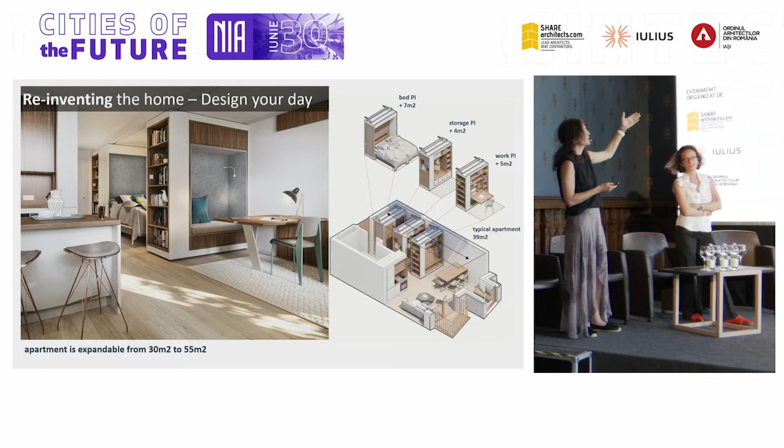This is a very interesting project, which is actually being built. We created this system with Vitra, where you can actually have a system of walls. You can actually choose what type of walls these will be. And this will give you options for your apartments.

To be honest with you, when we first did it, we didn't think that the developer would go for it, and we didn't think that people would buy it, because this was optional. But 80% of the people buying these apartments went for the option to select this kind of furniture idea.

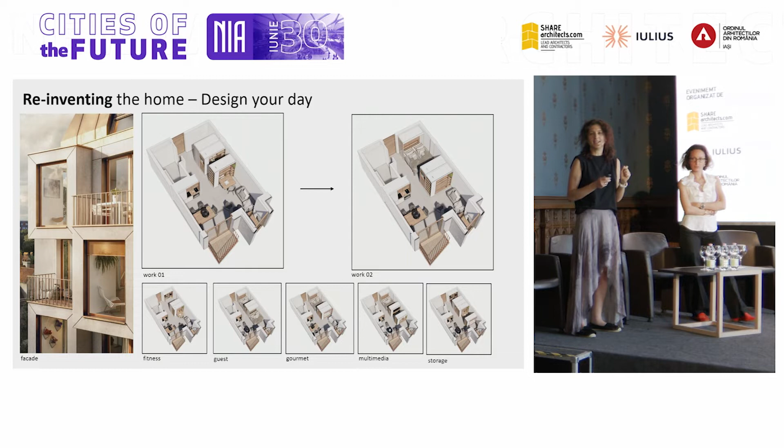So we come to this project, we come to Iasi. What we tried to do here is two things: bridge time. How do we bring together the old and the new? How do we create a notion of a future architecture for a city that is so heavily charged with history?

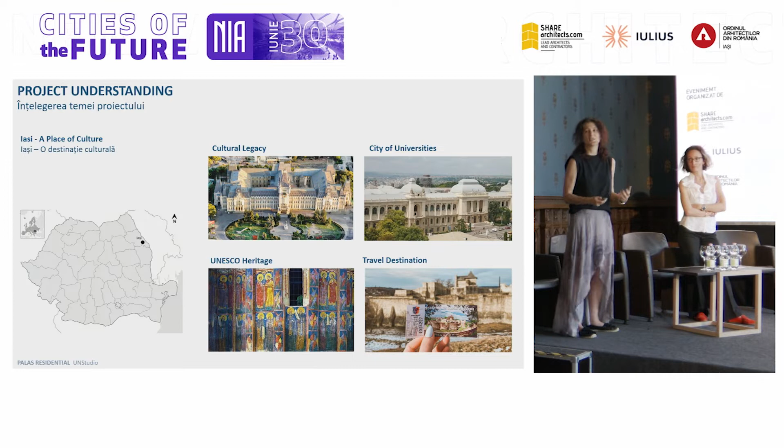Of course, we come to Iasi and we see that it's a very, very rich city in terms of culture, in terms of academic, in terms of business. It's very active, it's very socially active.

So what do we do? All of our colleagues explained how we had to meet program, how we had to deal with these extremely complicated regulations and restrictions. So we carved up the volume. We made the maximum, let's say, envelope of the building, and then we tried to see what happens with the program.

What type of program do we want to have there? We did not want to have fully residential. Of course it was a requirement to have a retail platform, but we wanted to maximize what we can do with the public area. So it's not just the public pathway, not just the public plaza, not just retail shops. It will become a very culturally and socially active part of the city.

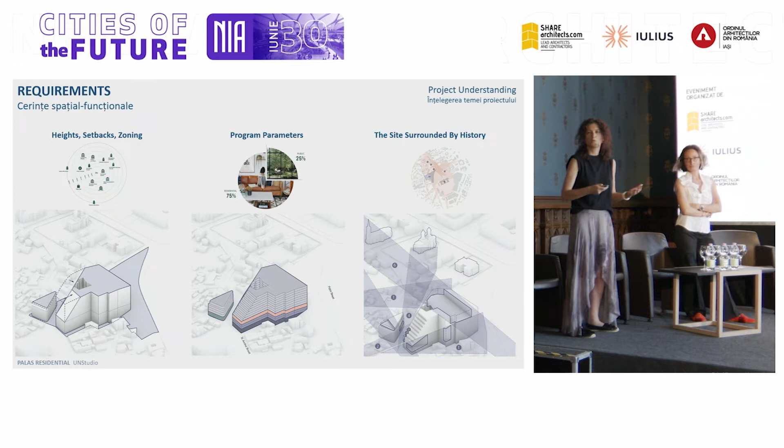And of course we had all these viewing corridor restrictions, which actually carved up the volume, which you saw in previous presentations, how that led to various massing explorations. So this is our goal: to create a contemporary environment in a historical setting.

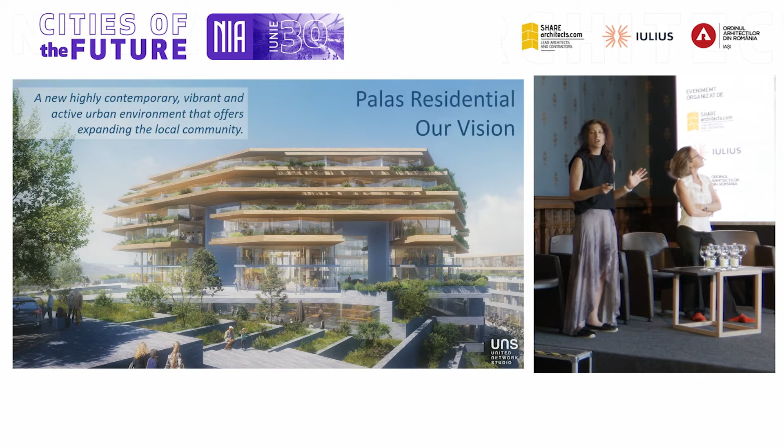We start by having some basic design drivers. What do we want to do? We want to add green. We want to create a green link to the city. We want to bring the Palace Square park through the building and down to the Sfântu Andrei neighborhood.

At the same time, we want to revisit how we look at the monuments around us. We don't want to stick to the existing views, we don't want to stick to what is known, but offer a kind of pathway, a frame, a frame-by-frame journey through the project.

We want to do that with respect to people and the environment, a human-centric approach, tactile materials, earthy materials, a lot of green, a biophilic experience that would enhance the microclimate, that would make a cooler space within the hot summer.

And of course the goal is to create a new urban community. This is the place where we think people can make little offices, where creative individuals can do a pop-up practice, where you can have co-working spaces, where you can have exhibitions that relate to the Palace of Culture.

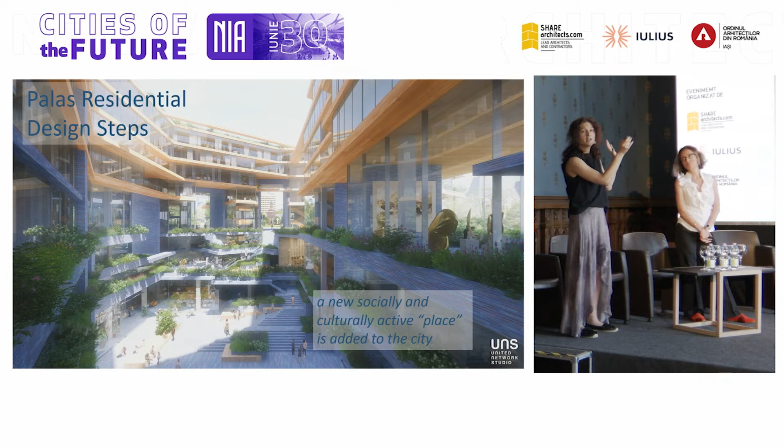We want to create a lively courtyard where you can see the past of the city, but where people are actually working towards the future of the city.

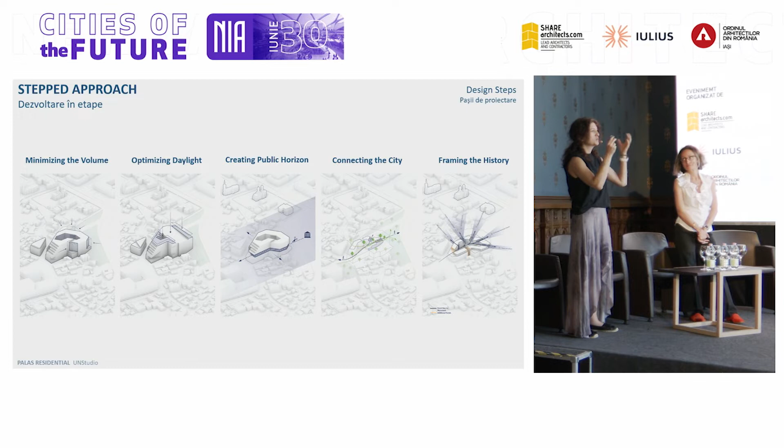Stepped approach - this was necessary, of course. The volume, the maximum volume, and the various steps that we took in order to reach our final massing. We will focus on 5 main steps from this process. First of all, we took the original massing, the maximum envelope, and we tried to squeeze it in height as much as possible. We actually managed to go almost 10 meters lower than the allowable maximum height.

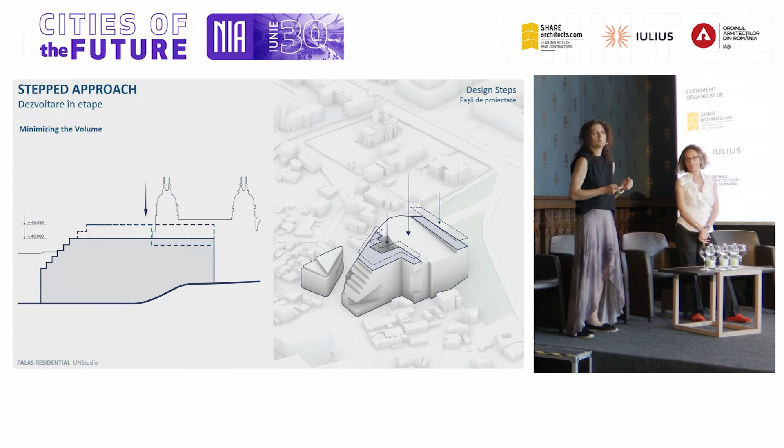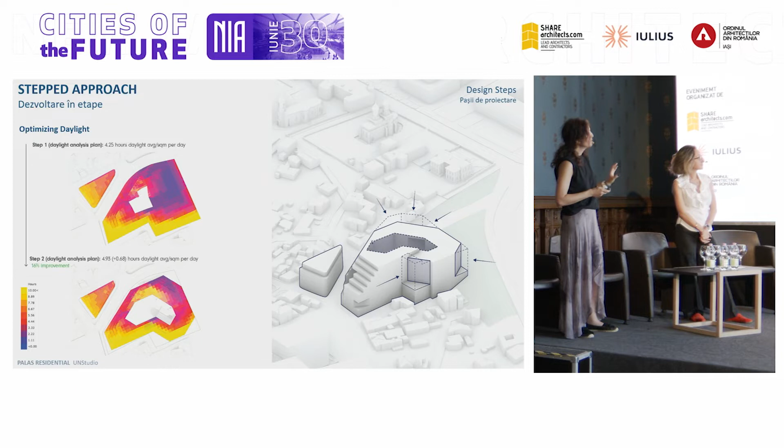Of course, daylight is super important for apartments, super important for people's health and the way they feel. We analyzed this and made sure that all apartments have the proper daylight, even in the worst time of the year. In order to achieve that, we chopped the massing even more.

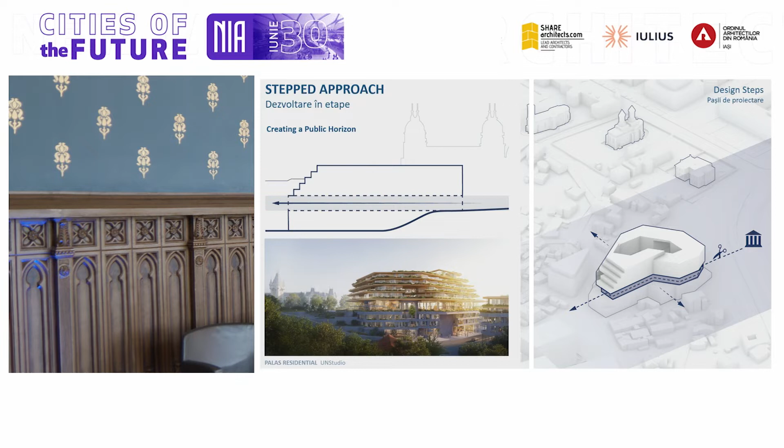And here is one of the main pillars of our proposal. We wanted to split this volume even more so that we reduce the perception of its volume. So we create this horizontal layer that pulls through Palace Square, through the building, and it divides the building into 2 parts. We have this transparent horizontal layer where you can have 360 views.

This layer is the layer that we want to socially activate. This is our community layer, let's say, where you can have all this flexible program, workspaces, community functions, and so on.

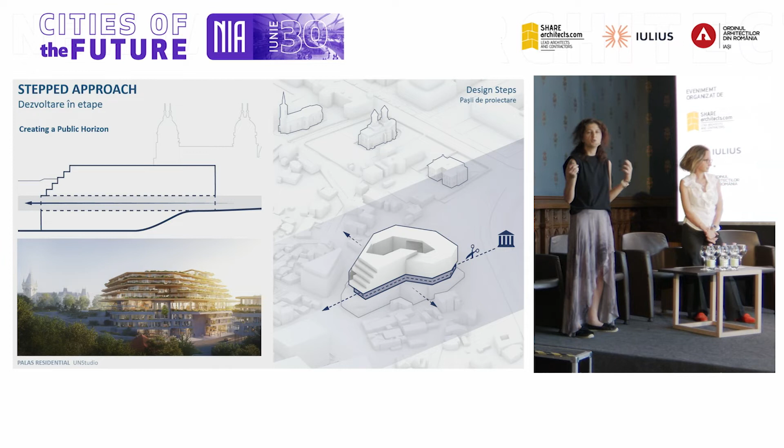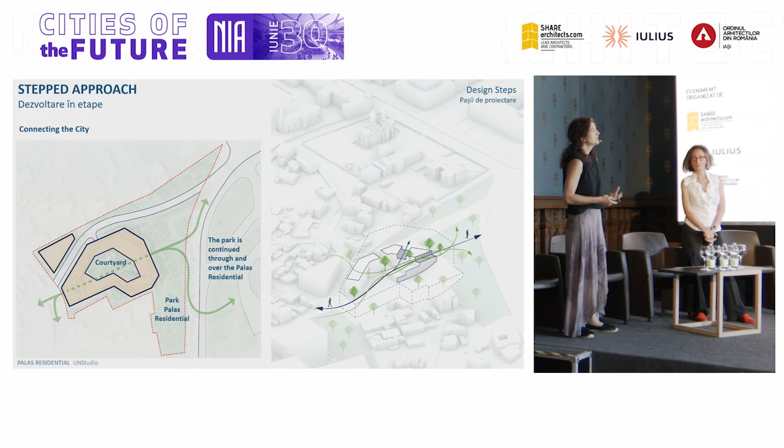And the other important part of the project is this courtyard. What is this courtyard? It's a green heart, but it's not enclosed, even though it looks enclosed. It's permeable. You can access Palace Square from Sfântul Andrei neighborhood.

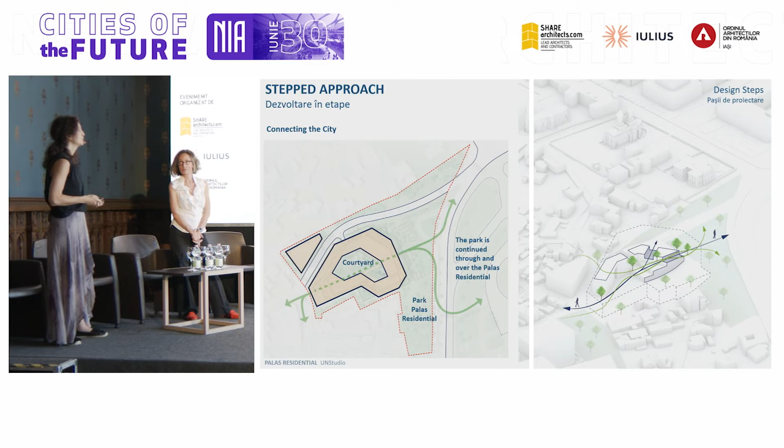You can have various paths through the building. You can connect the Amazon headquarters with the mall. You can create a new pathway for people to go through. From Sfântul Andrei neighborhood, this is kind of how you would go through the building to access the Palace Square.

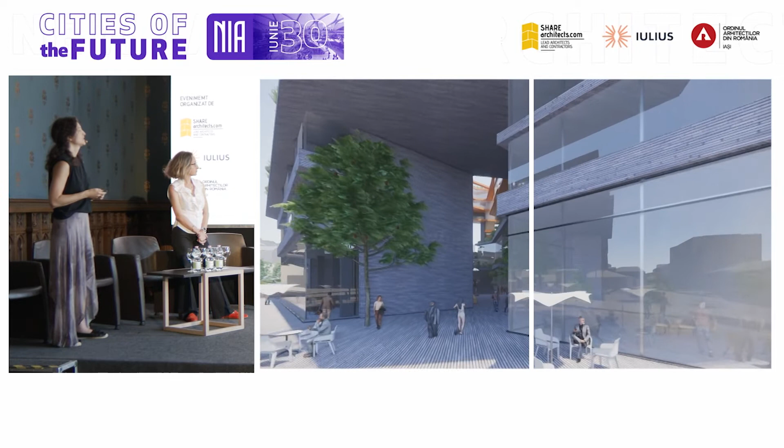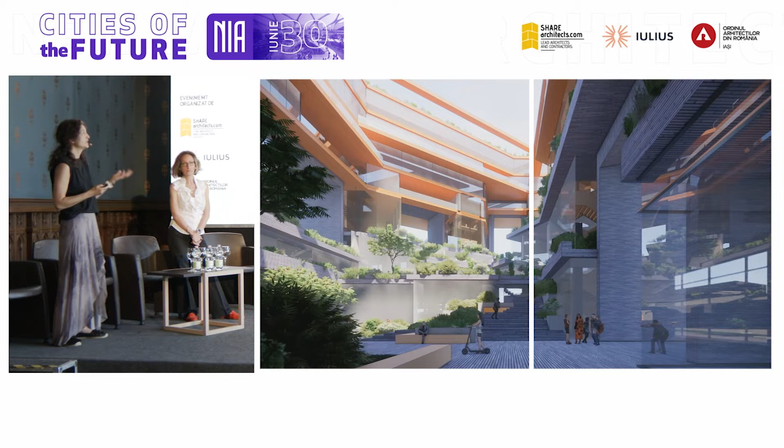And you end up here, and you continue forward, and you can take the steps. You can perhaps stop for a coffee or buy flowers. So this retail platform will be made of small shops, community amenities for the people that live there or the people that live around. So I believe it's clear that context integration is the driving force of our proposal.

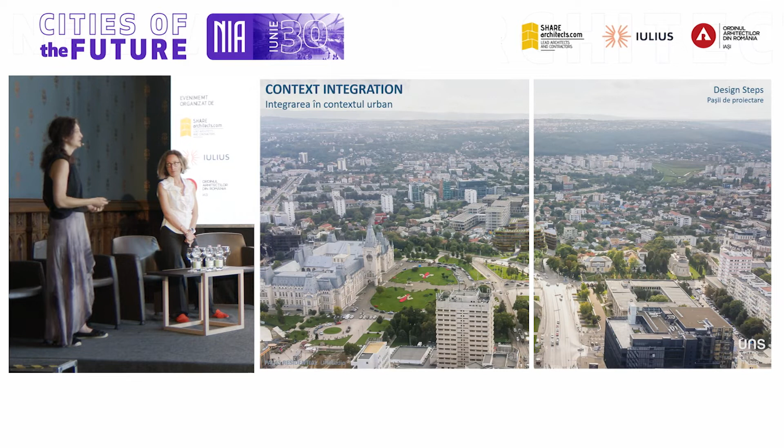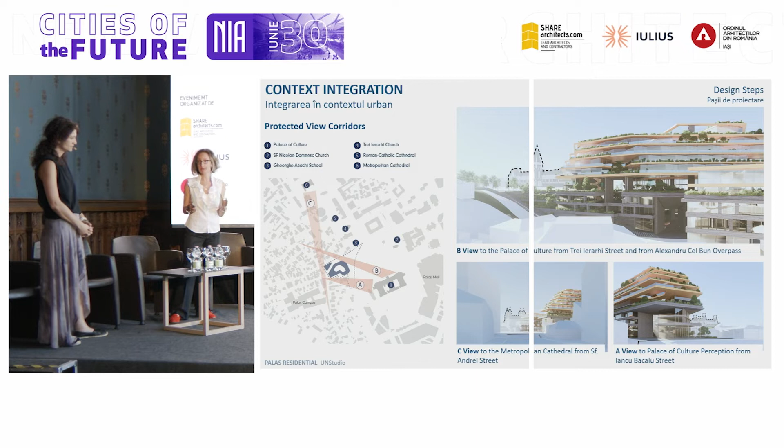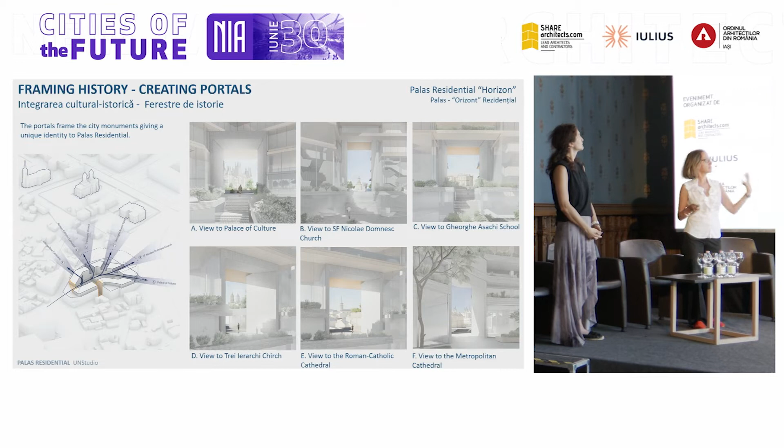And I will pass on to Denise. For the context integration, aside from the protected views that we all have to respect and build our massing on, we wanted to take it a step ahead and introduce additional framed views within our project that not only protect the views, but invite the context inside the projects to create a new perspective for the city.

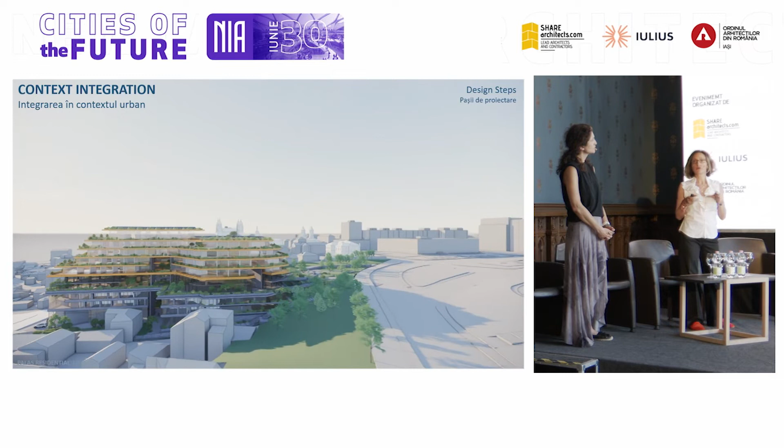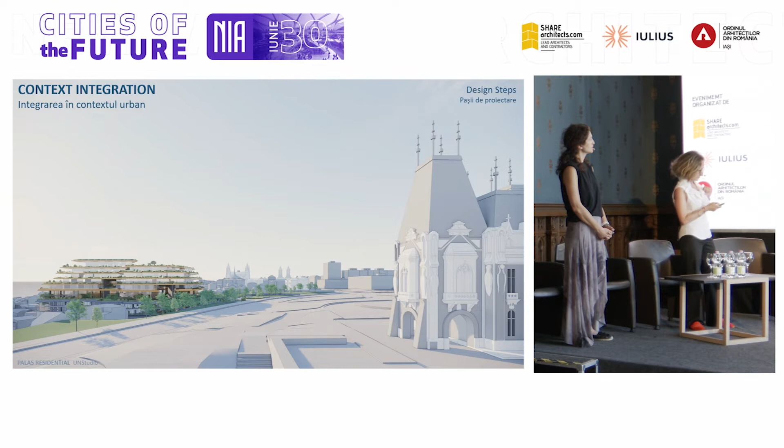So we use these new framed views to create a more permeable ground plane where the scale of our lower St. Andrei neighborhood is much closer to the existing urban context, and we can have a flawless flow within that area. The framing you can see in this view is not only breaking the volume, but creating a new scenario, a new perspective to the city.

To look at it when you're having your coffee, you have this kind of small perspective view of the palace or any part of the city. When you turn around, you have a 360 view of every different kind of moment within the city. So it aims to create a poetic, more intimate relationship with the context.

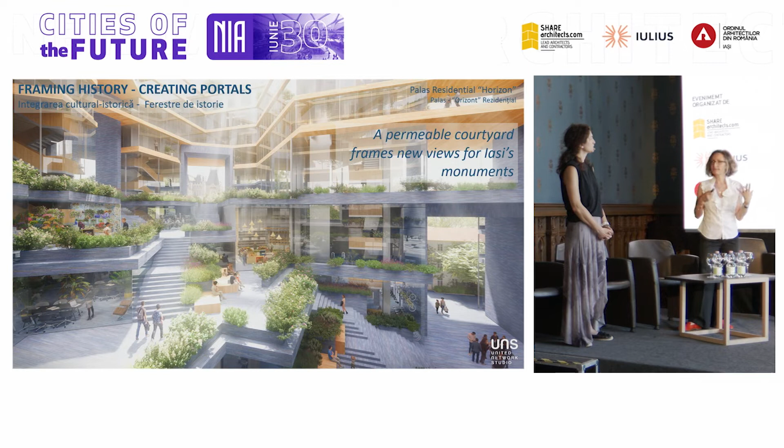So when we move into the building and how it fits within the urban context, as Stella mentioned before, pulling the green from the Palace Square towards the St. Andrei neighborhood was one of the main aims. In order to do that, we wanted to create this completely public open plaza and allow this upper green zone to flow down to the lower neighborhood.

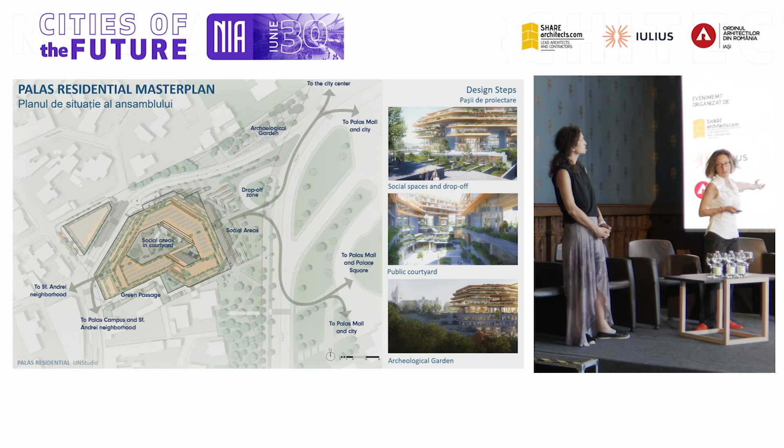So in order to create this continuous flow, we thought of the project as a horizontal layering. We had the horizon level, the communal space, which is transparent, almost non-existing. Then we have the lower plinth, which responds to the St. Andrei neighborhood with its scale, its materiality, its program. And above we have the sky residences, very natural flowing spaces that are almost floating in the sky.

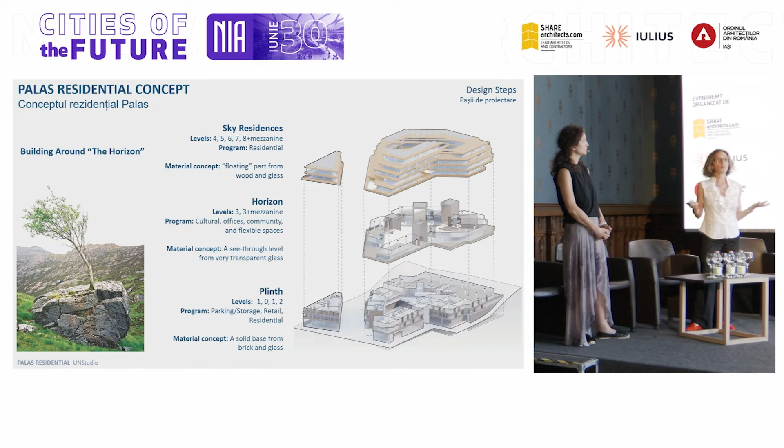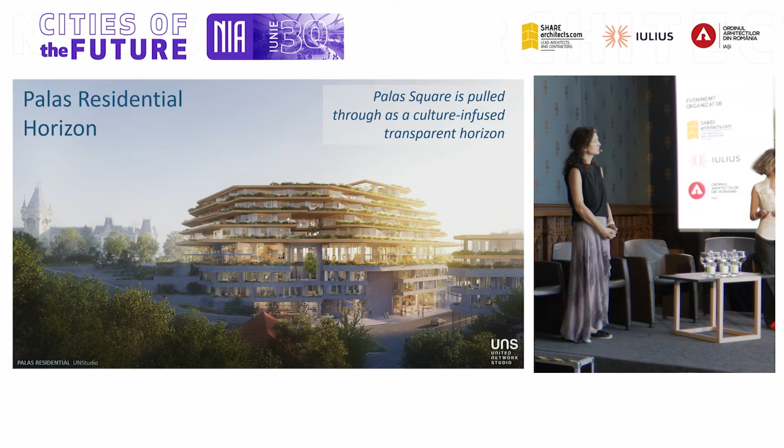So you can see here how we thought of the project not in a vertical division, more as a horizontal flow of people, flows of programs, and how they can be tied in with a courtyard in the middle. So the horizon is actually...

...one of the heartbeats of our project, I would say, because the idea of the horizon layer, its transparency, is not only in its architectural language but in its program, to be able to house creative industries, co-working spaces, art galleries, all kinds of cultural programs invited there to be part of this transition within the public realm.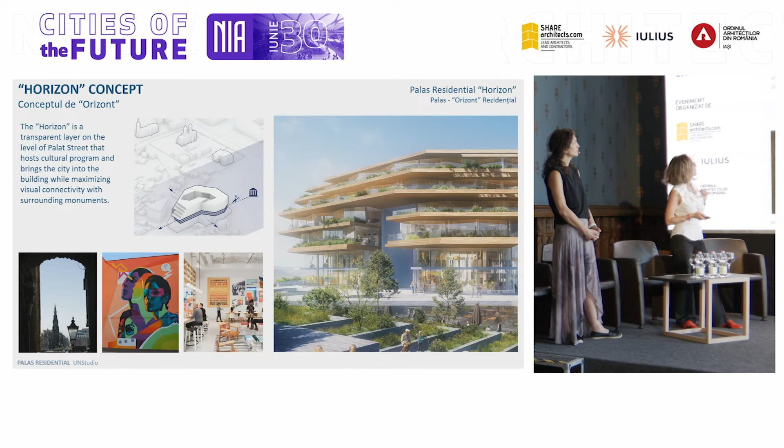And you can see here how the horizon level and the plinth level are not one large volume. Rather, it consists of small volumes, a cluster of small volumes, where these frames we mentioned before create the division of these volumes and the flow of people.

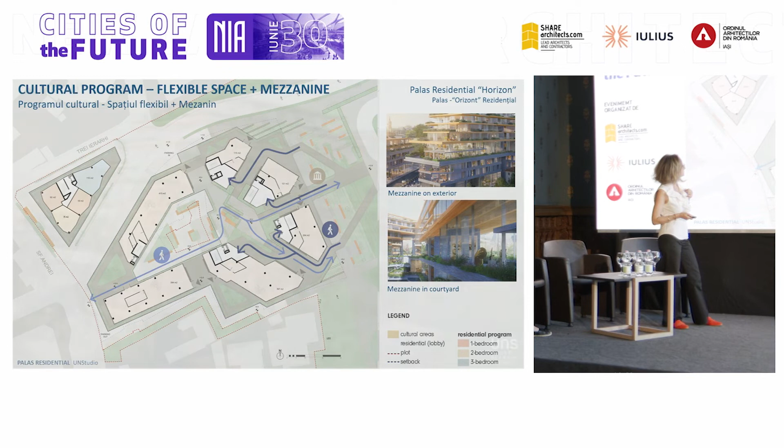So here you can see from the Sf. Andrei neighborhood how the horizon splits the volumes, and the sky residences are almost floating with their natural material, their lightness, whereas the lower neighborhood takes the grain of the city and responds to its immediate surroundings.

So our aim was to really take the close proximity of the neighborhood into the project, rather than creating a more vertical connection, to truly communicate with the immediate neighborhood and allow it to influence future developments, to say you don't have to have an entrance, but rather the city pulls you in with its retail, its plaza, its small courtyard space.

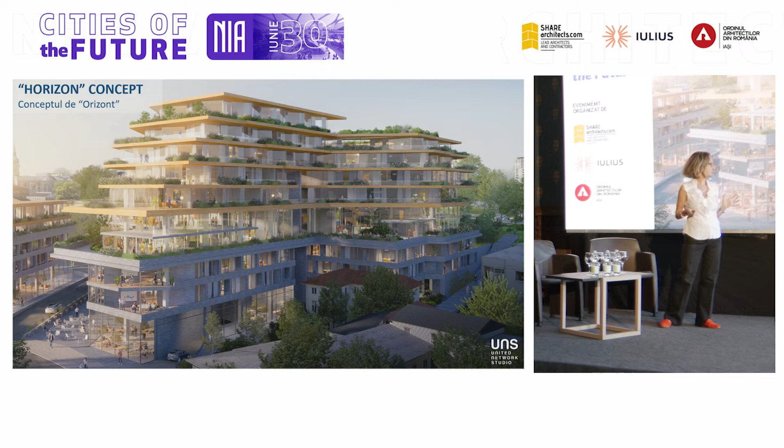I think this is one of the clearest ways to describe our project, because the aim of pulling the green from the Palace Square towards the Sf. Andrei, and the transparency of the horizon level, is very, very apparent in the section that we show.

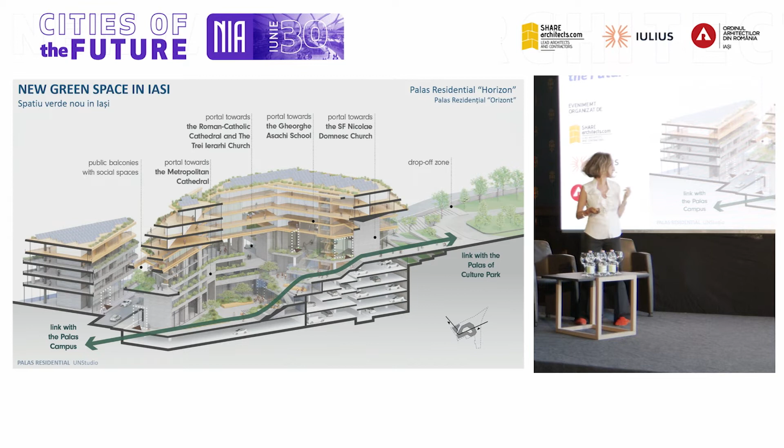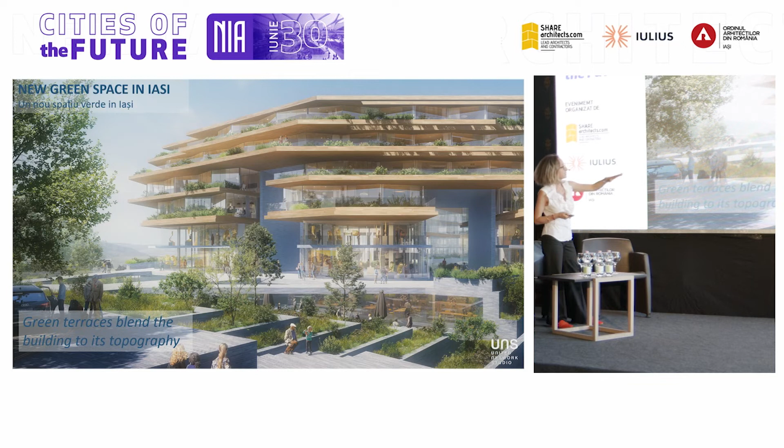The idea of these terraces and greens is not only to pull it from up to below, but also to be able to take the archaeological garden and the Palace Square, and allow the site to wrap the project around and distribute itself towards the context. You can see here how the stepped approach is moving down. I think there's an animation.

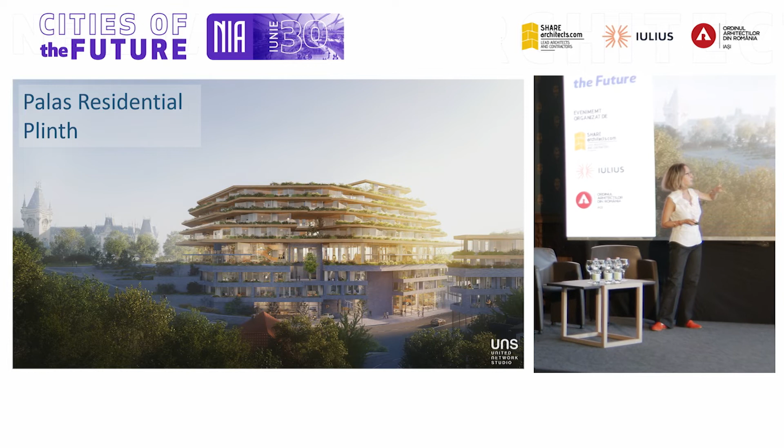When we look into these individual elements, after the horizon, which is transparent, we go into the plinth area. What for us was very interesting is that it literally starts from the Palace Square, blending in the site and the flow of people towards the smaller grain neighborhood scale. Within this area, we thought of using natural materials like brick and a more solid language to respond to the immediate surroundings.

We will have small-scale shops and basically a neighborhood feel, strengthened by the architecture and the programs. Rather than a large green space filled with terraces and cafes, we wanted to create more intimate, small, almost pocket spaces within the city.

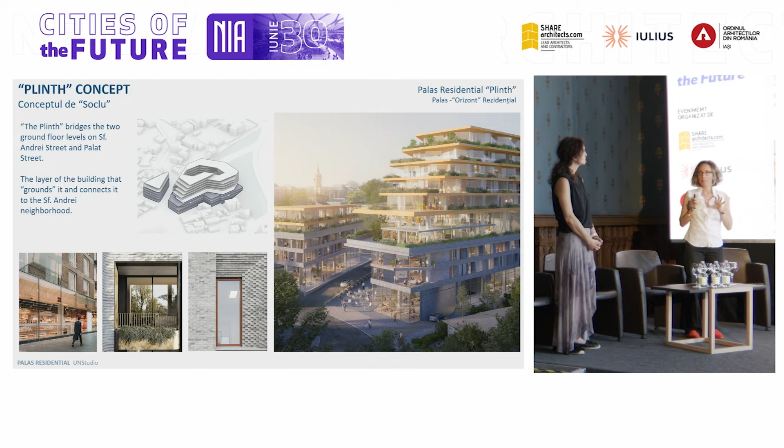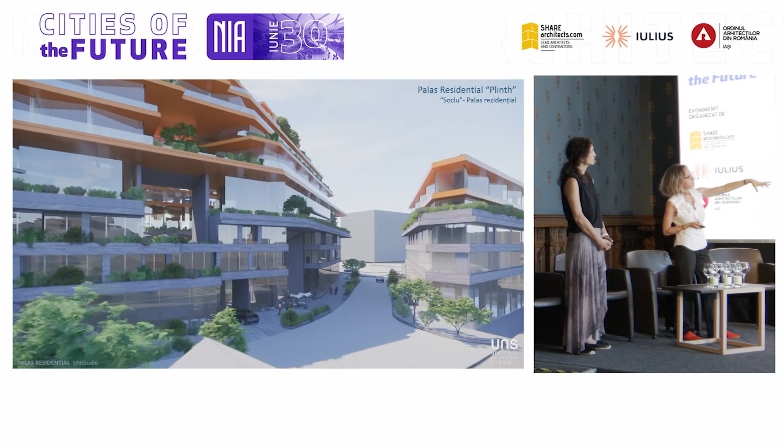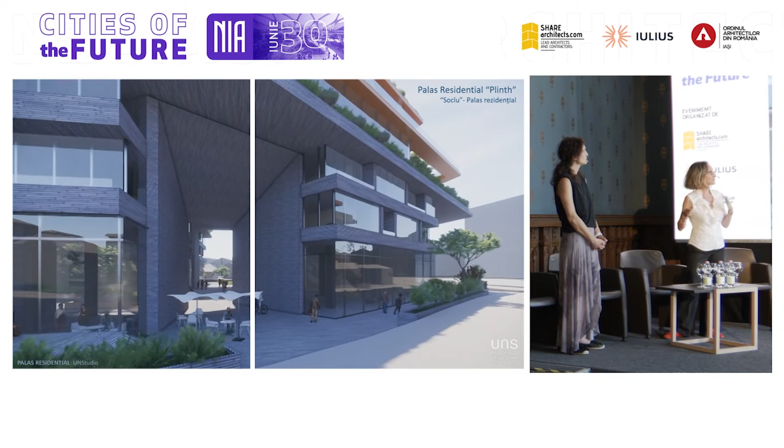This is a view of how you would start to come down towards the plinth. The idea of using the small site as part of the volume was a very hard decision for us, because we didn't want to go high. This pushed us to create the other volume. But in the end, we think it adds up to the neighborhood feel, because you still have the retail and the public spaces, creating another secondary interior street.

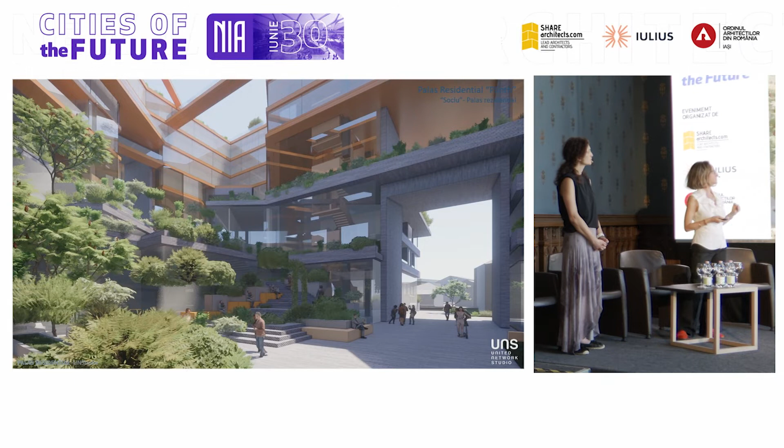You can see here how we think of the courtyards as a green space that is pulling down, but at the same time it has its small pockets where people can enjoy, like what we've been seeing for a couple of days in the park, where everyone has their own corner, their own kind of spaces. So we want to give people the opportunity to create their own spaces within the public realm.

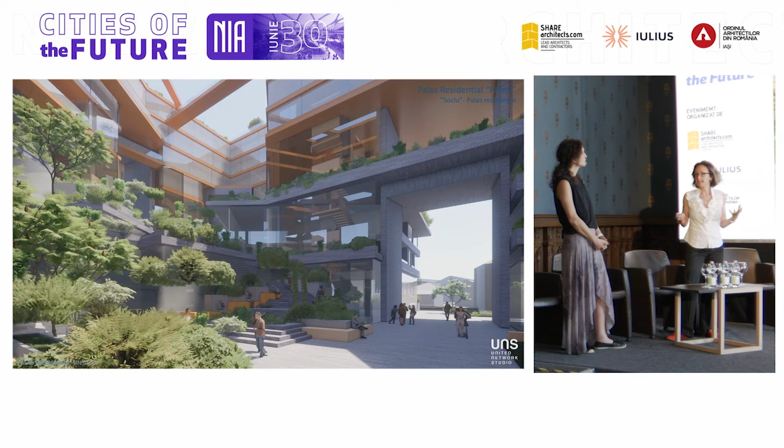As with the requirements within the planning, we also thought of parking as an integral part of the project, but not taking over, as all the teams have agreed. We wanted a very efficient parking structure with split levels, using more than what's required for efficiency, to avoid extra problems in the future. We also wanted to give the opportunity to create storage spaces for people that can be transformed to different uses in the future, for flexibility.

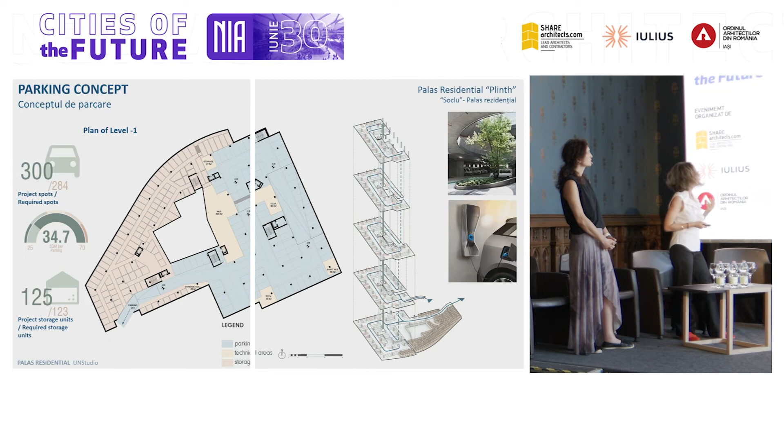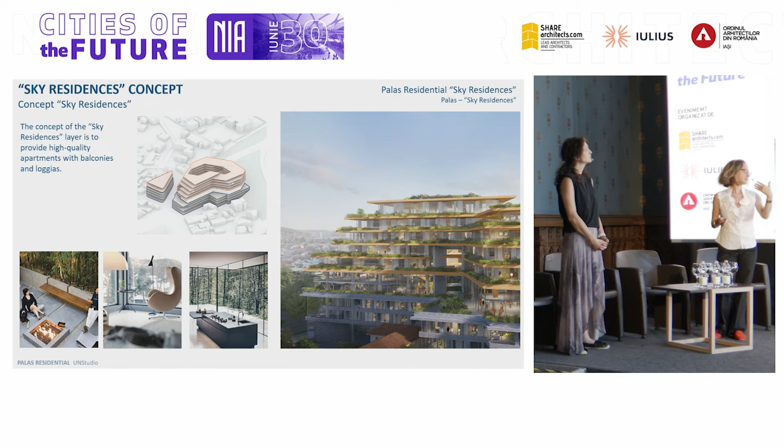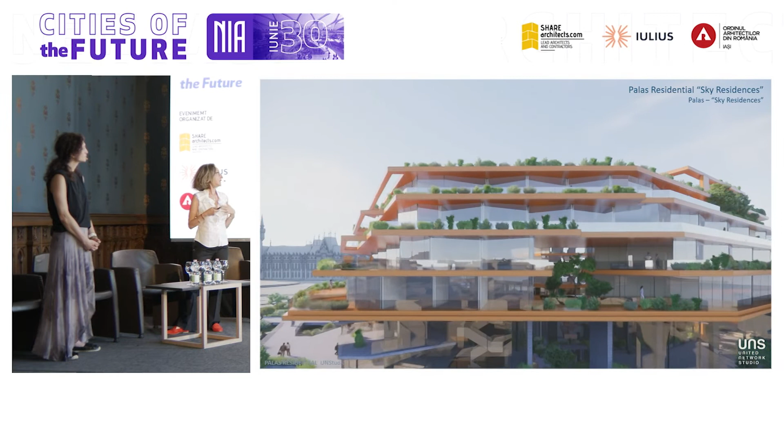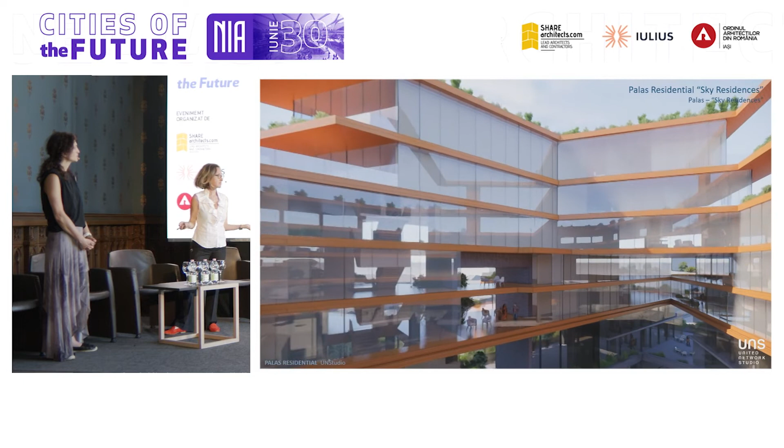So each residence has its own protected balcony space with quite nice views, because most of the residences are facing outside - all of them, aside from some double-sided ones. They all have great views towards the city and their own microclimate environments.

Within the residential levels, we also have smaller public zones where we wanted to create gradients of public spaces, so the residences also have gathering spaces that can be used in many different ways. This is the view towards the palace.

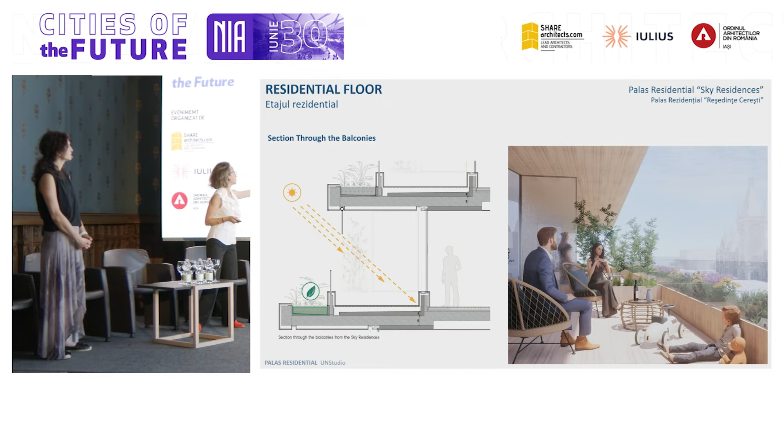Comfort and sustainability are an integral part of our project, but wellness and user comfort are also very important for us. Within the heat we're experiencing now, in Iași and everywhere, we thought balcony spaces shouldn't just be open spaces, but should allow different degrees of temperature control with shading systems and cantilevers. Through parametric analysis, we controlled how much shading we need to create maximum comfort levels in all seasons for the residents. Adding green to the balconies also adds to creating a microclimate.

Within the program overview, without going into much detail, the most important thing for us when we got the brief was how much of that program maximum can we dedicate to public. Even though we have to fill a certain amount of residences, for us it was most important how do we pull the public in, how do we make the project a beating heart not just of the residents, but of the community.

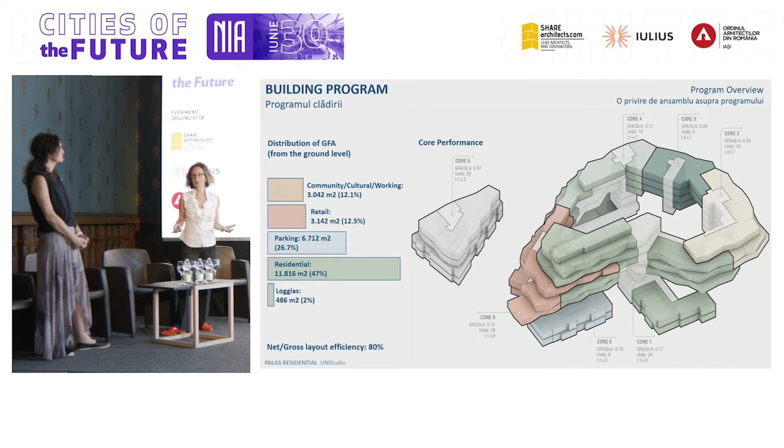You can see here that we really try to push the idea of horizon as an extra layer within the project. Aside from using retail as an activator, we wanted the horizon to actually be something new, that has the potential to be flexible, interchangeable in the future, to respond to the needs of the public.

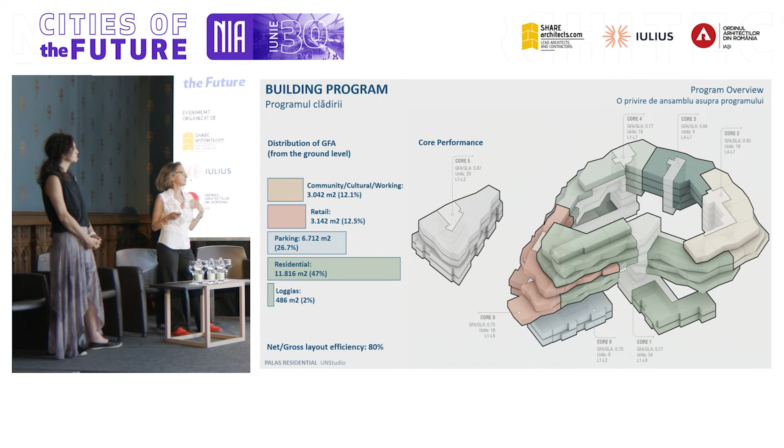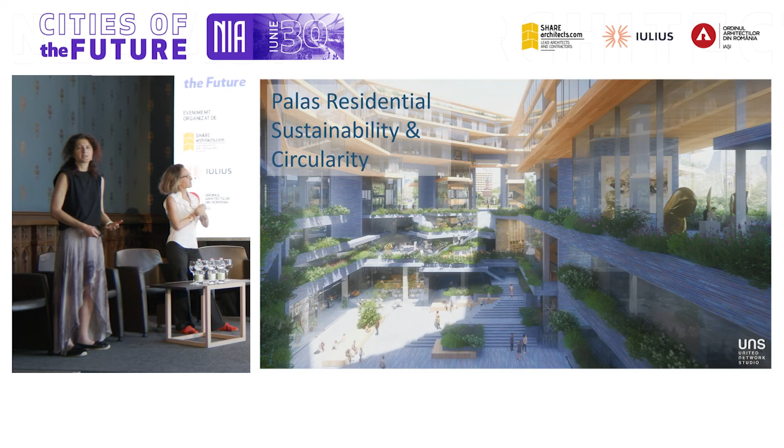And then for circularity, I take sustainability. As we mentioned before, sustainability is a very big part of everyone's project. Again, the same section, but to summarize the topics we wanted to address: firstly, the intention is to make a compact and very efficient envelope, which reduces energy needs.

Secondly, we want to propose solutions that would reduce embodied carbon. Then we have active design solutions, where we use a combination of PVT panels, heat pumps, and geothermal energy to try to make the building self-sustained when it comes to cooling and heating.

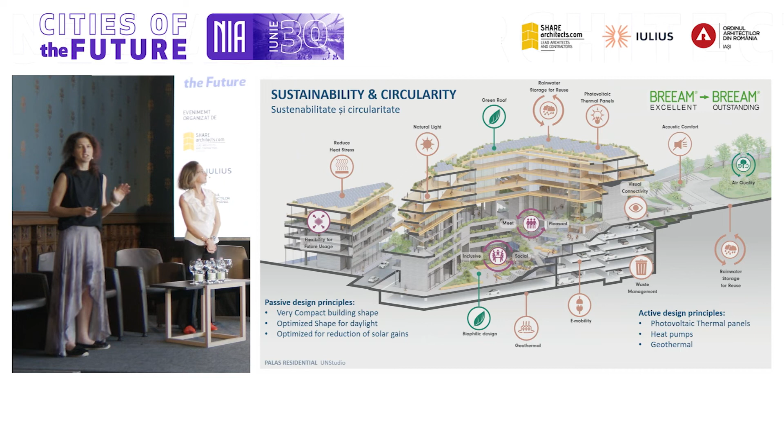So this is kind of the base strategy of the project. I will only focus on a couple of things because I think we have all told you quite a bit on this topic.

We propose an alternative construction system, a hybrid of wood and concrete. This is kind of the first idea that came to us about this particular project, where just by doing a simple thing like this, you can already reduce embodied carbon by 80%.

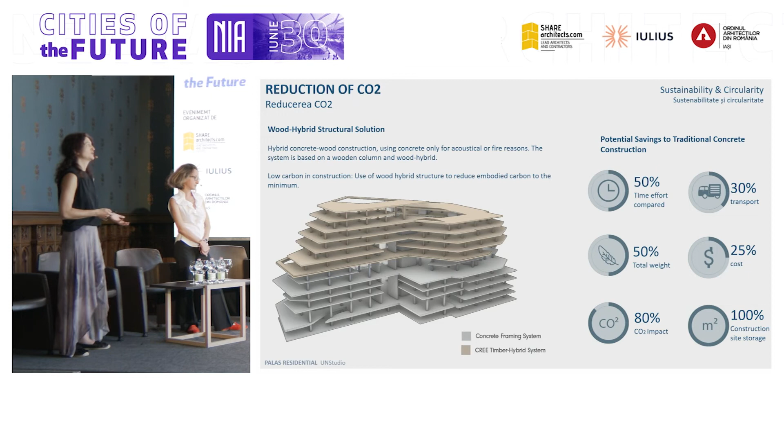The other important element is the green in green roofs, the green in balconies, the green in the public spaces. Apart from creating a friendly environment, it creates a microclimate, reducing the heat locally and in the vicinity.

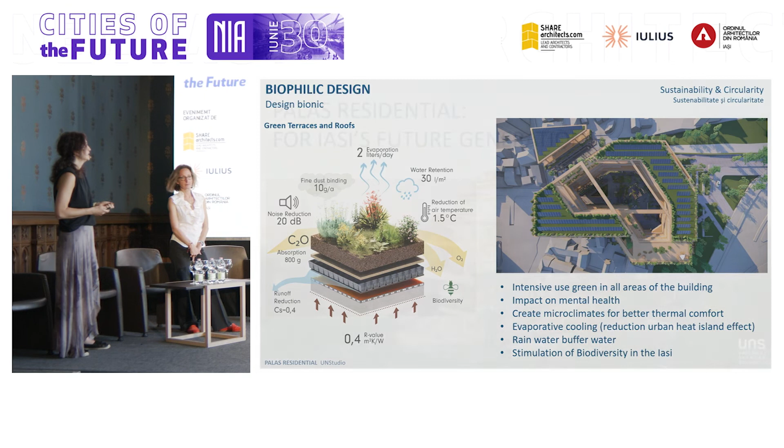Green roofs also hold water, so for about 11 days per month rainfall needs to be somehow attenuated. At the same time, we need to collect the water, recycle it, and reuse it to irrigate this whole complex. So this was the summary of our approach.

Maybe I go back. Yeah, this is better.

Thank you very much for your well-argumented presentation, but mostly thank you for making us understand the richness of people. Because if Ben van Berkel started to not necessarily be concerned, but be responsible that an architect is proofing the future, to proof the future you need to understand the world you live in.